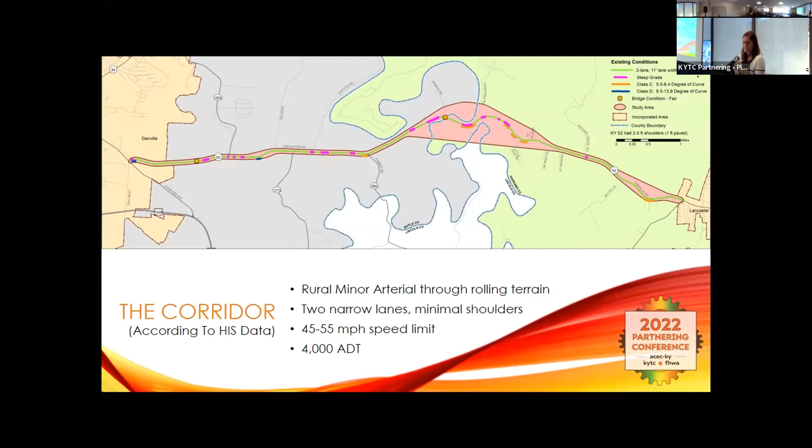Just to hit the corridor highlights, it was a rural minor arterial, like Casey mentioned, between Danville over to Lancaster. It's got narrow lanes, tiny shoulders, 45, 55 mile an hour speed limit, about 4,000 ADT. You can see some pictures here of the corridor itself, getting a feel for the typical section, the steep side slopes, some of the pavement edge drop-off concerns. It's one of those rural roller coasters where sometimes you can see and sometimes you can't.

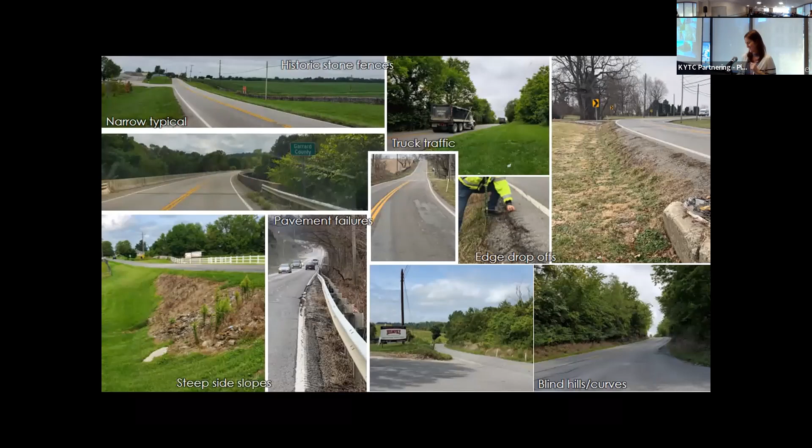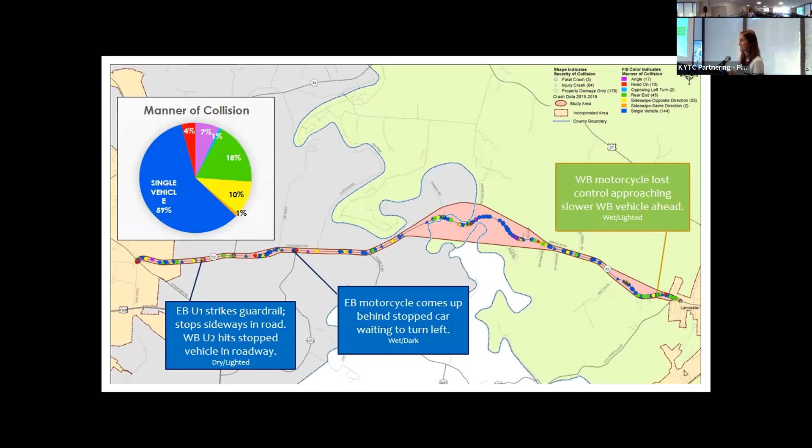There were 245 crashes over a 5-year analysis period, including 3 fatalities. You can see them called out with the call-out boxes. About 60% of those were single vehicle collisions, and I think 60% as well were roadway departure crashes, which tend to be more severe. So it was definitely a worthwhile corridor to take a look at and try to get that HSIP perspective blended in. Theresa is going to talk about how we approached the data.

All right, let's take a closer look at our corridor. The way we approached this from an HSIP perspective, with our HSIP hat, we used a new software for the HSIP process called TopoDot. It's a point cloud processing software. So we drove the corridor with mobile LiDAR, and then this software allowed us to extract features such as edge of pavement, center line, and use that information to get more detailed information.

Some of the benefits were, we could measure a lot of this stuff from the safety of a desk chair. We didn't have to be out there on this corridor with, as you can see, some very high truck traffic and wide loads, measuring things. It was a lot safer to do it from our desk. We could get a bit more data, like Casey said, with the data issue, a larger quantity of data, more accurate data. Point clouds are very accurate.

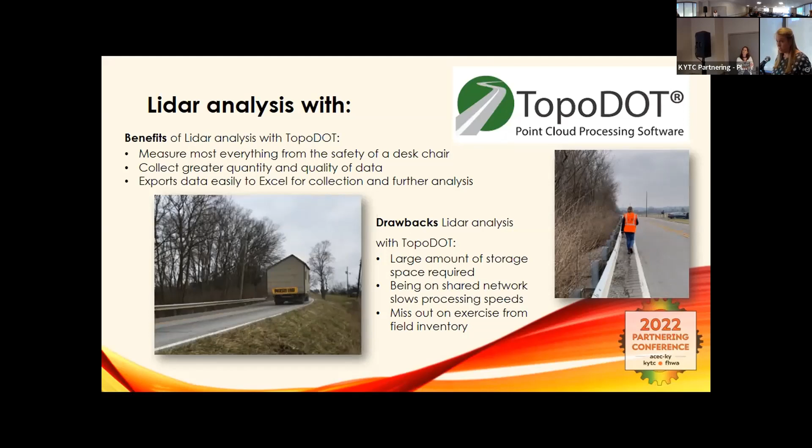Some of the drawbacks, though, is I didn't get much exercise. I did a lot of the analysis from my desk chair, which, like I said, is great, it's safe, but I didn't burn as many calories. Some of the other drawbacks is a lot of network processing was required for this, so when you're working on a shared drive with big data, that can be a slow process. But overall, we thought it was a great tool for analyzing this corridor's physical features.

A little bit more about how the program works. First step is extraction of features: get your edge lines, get your center lines, get your ditch flow lines, guardrail, kind of almost put them in like you would get in a traditional survey. But then the real value comes in step 2, the analysis, and that's where the program really helped us.

It had certain tools that could give you curve advisory speeds. You could measure the lane and shoulder widths at any increment you wanted, every 5 feet if you wanted. You're definitely not going to be able to do that out in the field. You can get pavement widths and drop-offs. You can get a slope because you have an elevation with your lines, so now you can get a slope between those 2 lines, and you can get that on any increment you want.

You could easily extract locations of utility poles and then sort them quickly by distance from roadway, so you can narrow in on which poles are closest and within your clear zone. Some other cool tools was pavement condition — it actually had a tool to do PCI index reports on pavement.

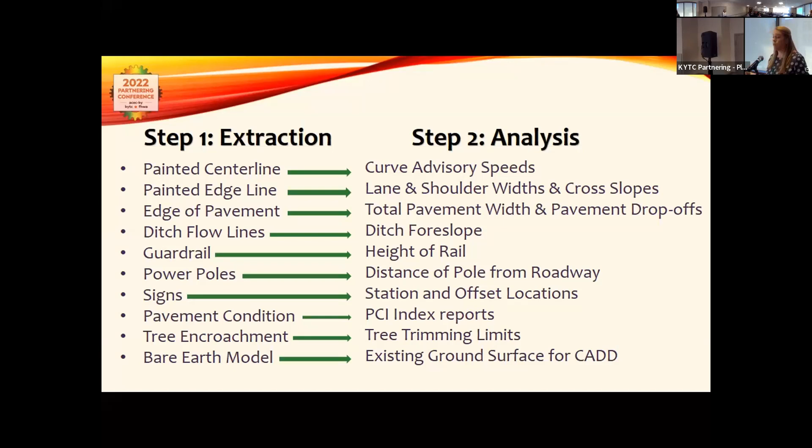Other things like tree trimming, and we could even create a rudimentary surface for analysis and design later on. Just to give you an example, here I've got curve advisory speeds where by station it told you what the computed speed was. This is kind of a black box for us, so we used it more as a tool to narrow down which curves we needed to take a closer look at.

The graph on the bottom is pavement width by station. It's a lot of data, but generally you can see we have between 22 and 24 feet of pavement width. Of course there are outliers, places where we're narrower or wider, but in general we can say with confidence we're between 22 and 24 feet, which is sometimes hard to do on these HSIP projects. This graph really gave us a good representation of the corridor as a whole.

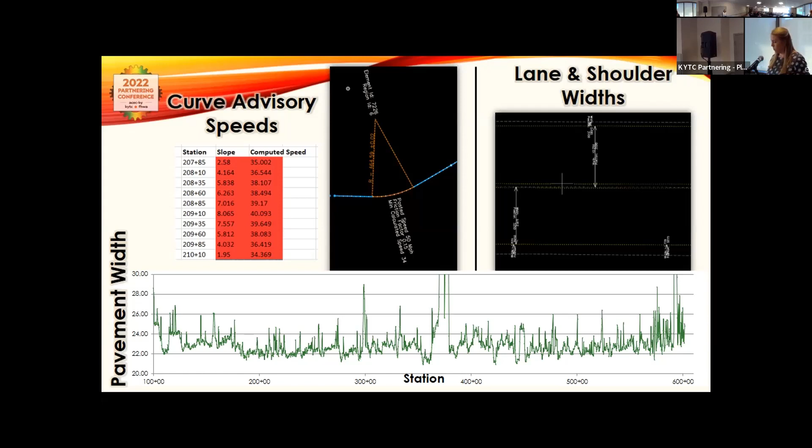Another example, like I said before, side slopes. We could sort where we have those steep drop-offs, where we need to maybe look at doing some roadside regrading. Another extraction we could do was pavement edge drop-offs, where you get that lip, and if your wheel hits it and you try to overcorrect, you can lose control quite easily.

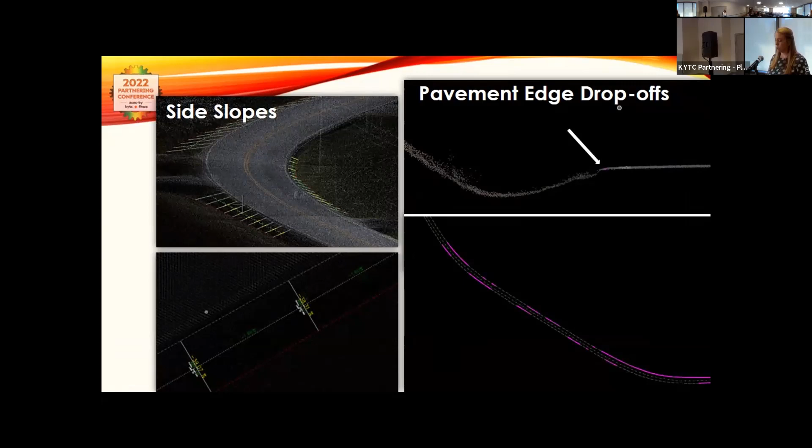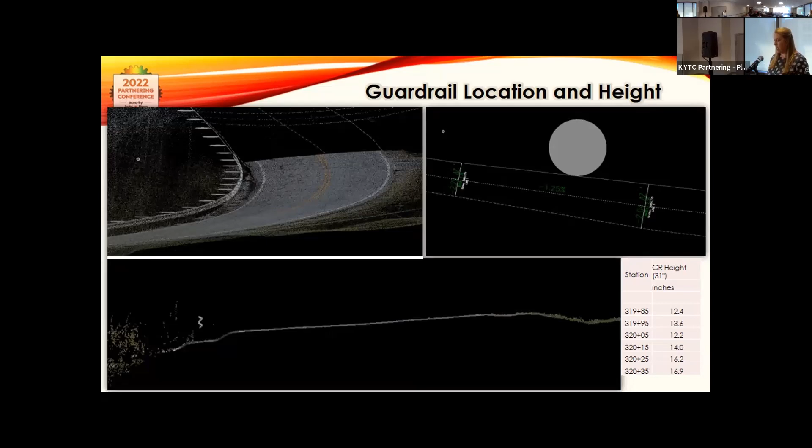Guardrail - once we extracted the guardrail, we were able to tell the height of the guardrail and the offset of the guardrail from the edge of the pavement. That was useful. Utility poles - we were able to place a cell where all the poles were and quickly sort them by station and offset from your center line, so you can quickly see which ones are closest.

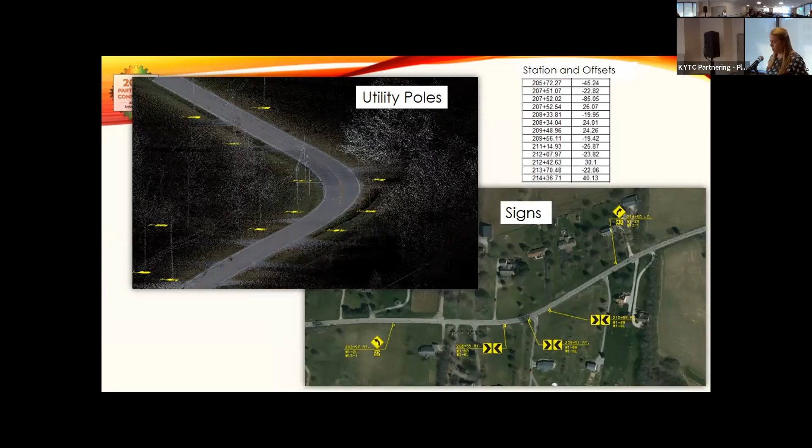Signs - you can get those through sign inventory off LiDAR and through TopoDOT. This is the other one, pavement condition - another one we used as an indicator of where we needed to start looking for rutting and other pavement failures.

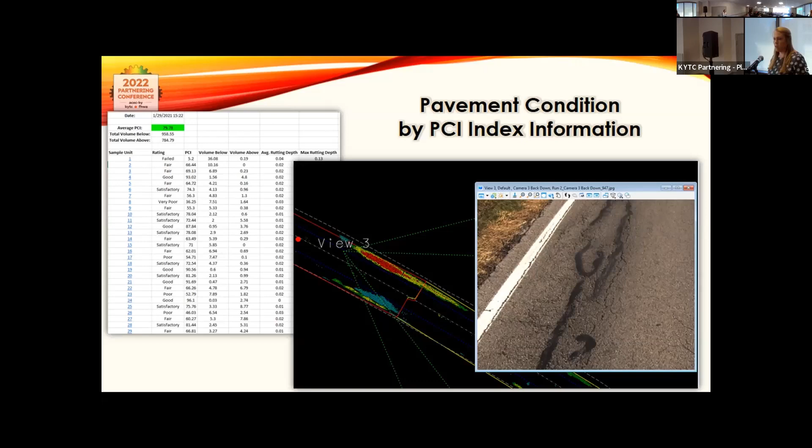And then probably my favorite tool was the super elevation. You could get the cross slopes at any increment you wanted, and then plot those cross slopes and actually see the curve of the super elevation and how it was behaving versus what it should do if fresh from design. This really helped us find areas where we had really bad cross slope. This one's not bad actually - this is a pretty good example, but I should have included one that had negative cross slope on a curve. That was my nerdy engineer tool that I like to use a lot.

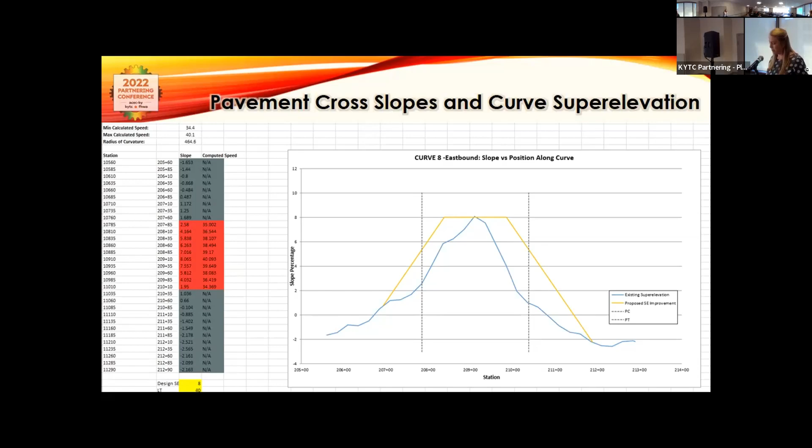So that's a lot of data, and I'll let Rebecca talk more about the analyzation.

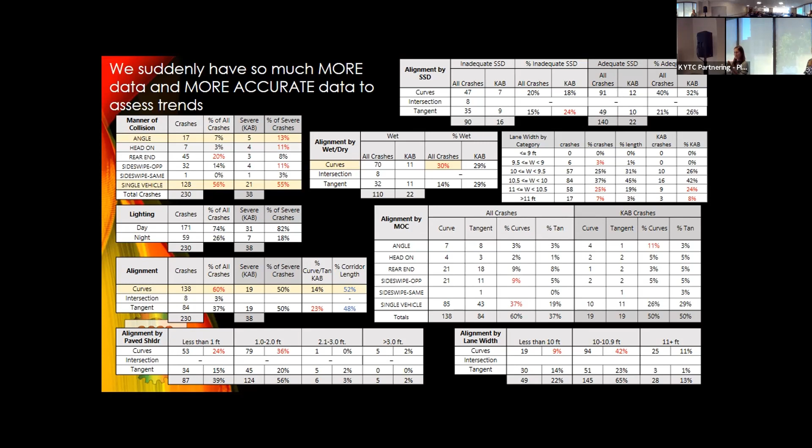Definitely coming at it from the traditional planning experience, where we're blending in HIS data that says you have 11-foot lanes and 1-foot paved shoulders. Now we suddenly have so much more data to work with from TopoDOT and the LiDAR information that Theresa was talking about, and not only do we have more data, we have more accurate data.

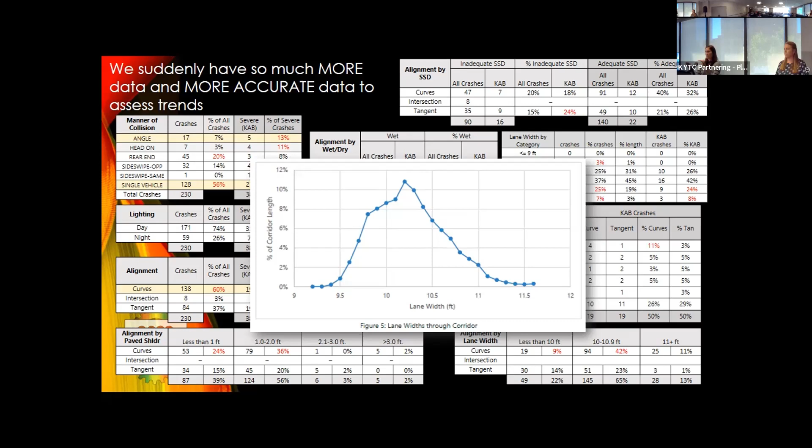Just one quick example - HIS says you have 11-foot lanes. After we ran the extractor TopoDOT tool, you can see we got about 6% of the corridor that has 11-foot lanes; we're a lot closer to just over 10. And then multiply that by every single feature that Theresa just talked about - so we had a ton more to look at.

Just taking, for example, the curve data, we were able to get a lot more information about individual curves that you can see summarized in the table at the bottom of the screen. We could calculate exposure, knowing that 52% of the corridor landed inside a designated curve, whereas we saw 60% of the crashes in those segments, which told us we should focus in on that. We were able to slice it down and look at curves by radius and see where those trends are popping up. The table shows the highest concentration of crashes in curves with tighter radius, less than 600 feet.

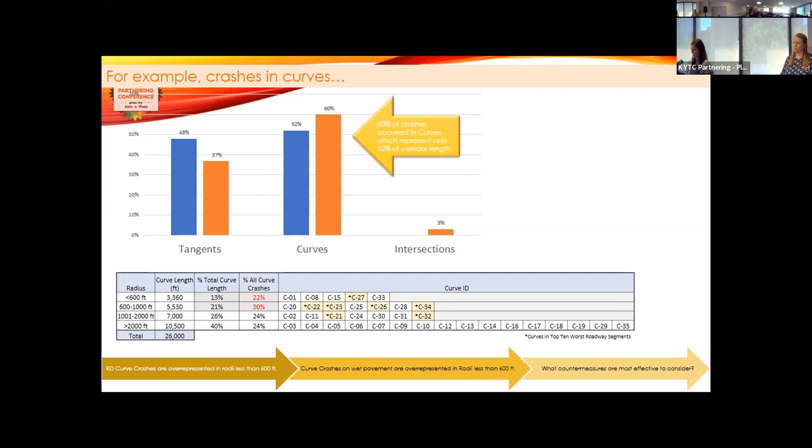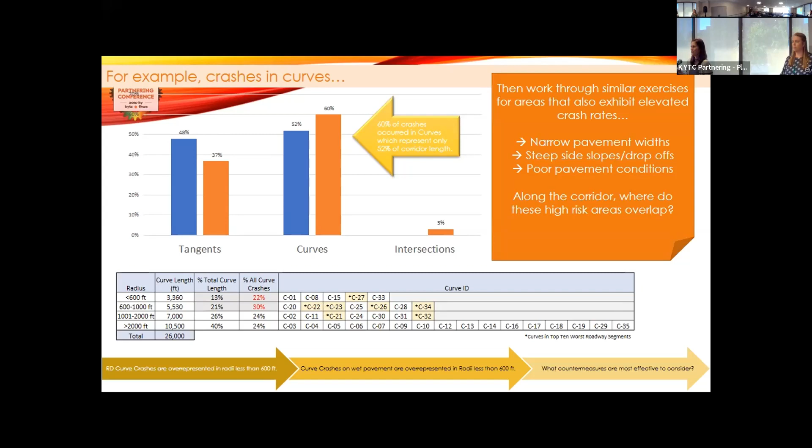We were also able to zoom in and see that curve crashes on wet pavement were overrepresented, and really focus in on which countermeasures are most effective for the situations we're seeing overrepresented. Then multiply that by looking at pavement widths, side slopes, and pavement condition, really digging into the data-driven elements of the analysis.

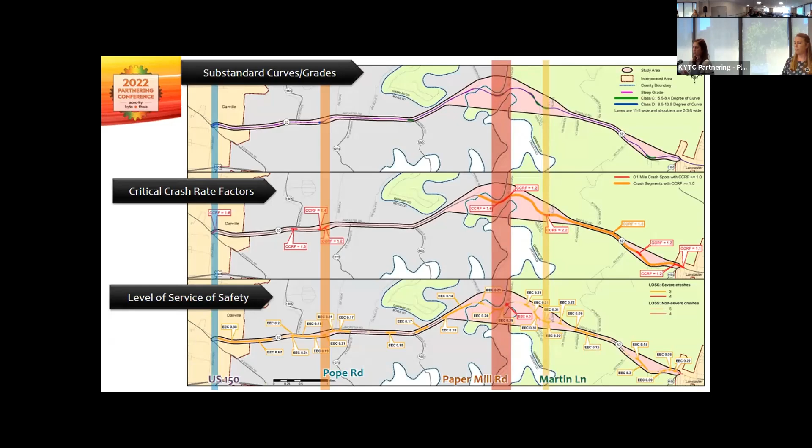One of the other key things that the planning process brought for the HSIP team was having conversations with local officials on the ground. We've got the data to know where the substandard curves are, where the grades don't give adequate sight distance, where the statistical analysis shows a high critical rate factor or poor level of service of safety, and we can overlay those to get target areas to look at from a planning perspective.

But because it was a planning project, we were also able to reach out and engage with local decision makers, the mayor, the maintenance guys, and the public through a community survey to really understand, for the people driving the route and pulling wrecks out of the ditch lines, what they're seeing, where the accidents and crashes are happening, as well as where the near misses are happening, to get that on-the-ground feel for what's going on.

Definitely the data was pointing us more to focus on the Garrard County side of the route because it had so many substandard curves and crashes. But if you notice the pink dots on the map, a lot more of our comments came from the Boyle County section, which we would not have necessarily zeroed in on just looking at the crash data.

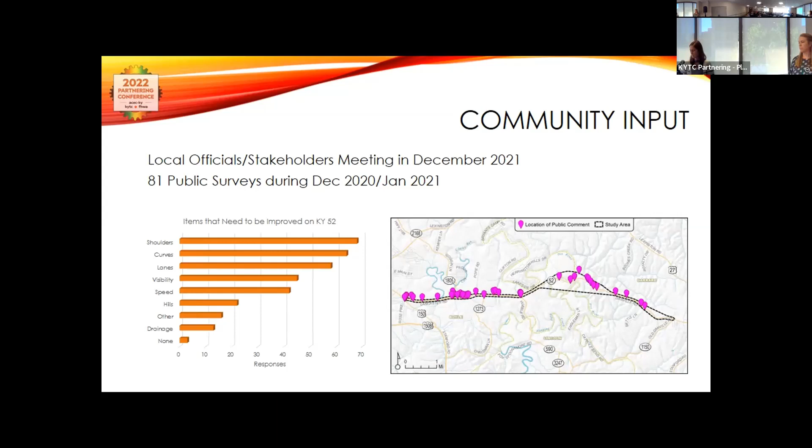So the third approach is that since we work on methods from two different directions, we were really able to look at a wider selection of improvements than what would be considered in just an HSIP study or just a planning study, so that nobody gets left behind or forgotten, right? And Theresa's going to talk about that.

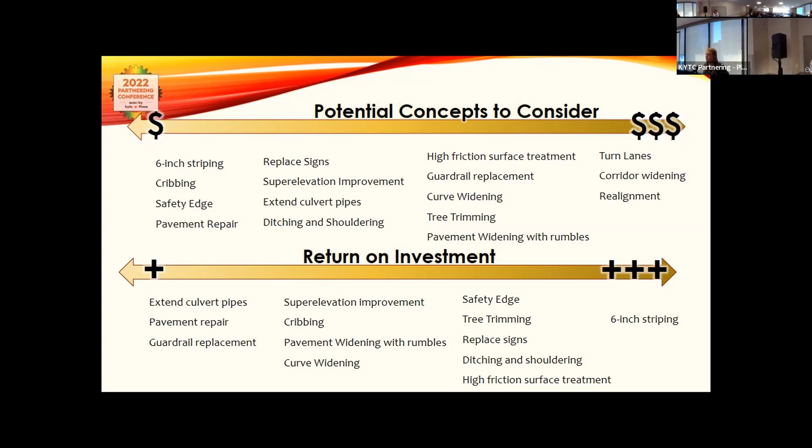So first, to talk about some of the things we'd consider with an HSIP project to improve safety on this corridor. Like Rebecca said, we have a bunch of data, a bunch of ways to slice and dice it and look at it. But at the end of the day, there's always a budget. So we have different concepts to consider, they all have a cost associated with them, and there's also a return on investment associated with them. That's where we had a lot of collaboration with our planning folks, and they really helped us with that as well. But ultimately you also have to mix in a little bit of engineering judgment, and eventually we arrived at the HSIP countermeasures that we would be advancing.

Some of them were corridor-wide, where we saw there were just so many steep drop-offs on this corridor that we should do roadside regrading everywhere. Guardrail, same thing. Permanent paint, 6-inch paint and striping - I mean that's just easy. The ROI on that is so high, we've got to do that everywhere.

However, there were some other improvements that maybe didn't make sense to do everywhere, and we really needed to focus in on those areas that we identified through our earlier analysis, where we would get the most bang for our buck if we did it in just those targeted areas.

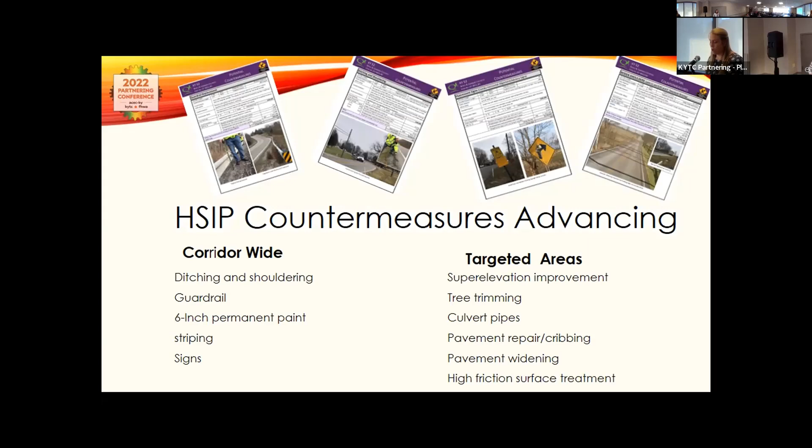One of those in particular are the pavement widening. We got a lot of benefit out of rumble strips. However, we couldn't put rumble strips down unless we had enough pavement width. So we can't afford to widen the entire corridor, so let's just do it in the area that Rebecca alluded to earlier, in Garrard County, that has a lot of relief with the terrain and very bad sight distance. That's where we should really focus our efforts and target our funds. So that's kind of how we went about it on the HSIP side.

So then on the planning side, we kind of picked up where HSIP ran out of money, right? We can look at the big picture stuff, actual realigning the roadway, never mind the giant gas pipelines that are going to cost a bazillion dollars. We can look at full scale corridor widening, getting it out to that 25, 26 feet where you can actually put the edge line and center line rumble strips on it, as well as individual intersection improvements. You can see labeled on the map there, B through G. We ended up picking up one of the HSIP options there.

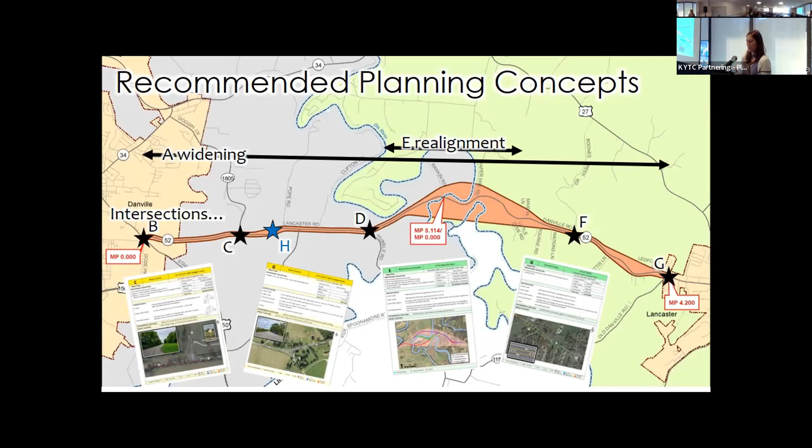Spot H is a set of S curves there near Pope Road, where we heard from the local officials, we get a lot of people running off the road here. This is the tree they always hit. This is the guy, he knows what to do. It's cool. But because we had a little bit more budget to work with, we were able to pick up those that fell through the cracks, to make sure that those good, valuable improvements are still picked up on the planning side. So this map highlights how those two overlap, with the stars being the planning intersection improvements.

And then the colors that are really hard to see at this scale, I apologize for this beautiful sunny room covering some of the HSIP stuff. So on the HSIP side alone, we were at about $2.1 million. If you fold in the short-term planning improvements on top of that, we were right at 2.7. And then if you fold in the long-term, eventual, maybe someday stuff, it adds up really quickly to somewhere over 30 million.

All right, so some lessons learned: HSIP puts the data in the data-driven process. Like I said, we have so much data and you can get lost in it pretty quickly. But at the end of the day, there's only so much you can do. Funds are limited, and you really need to narrow in on what your end goal and focus is, and that was improving safety.

So one of our other lessons learned was the benefit of actually talking to a larger group of stakeholders than you would engage with on a traditional data-driven HSIP project. Sometimes you get really good insights, and sometimes you get really good stories, but it was still a valuable exercise to work through. And Casey's going to wrap us up.